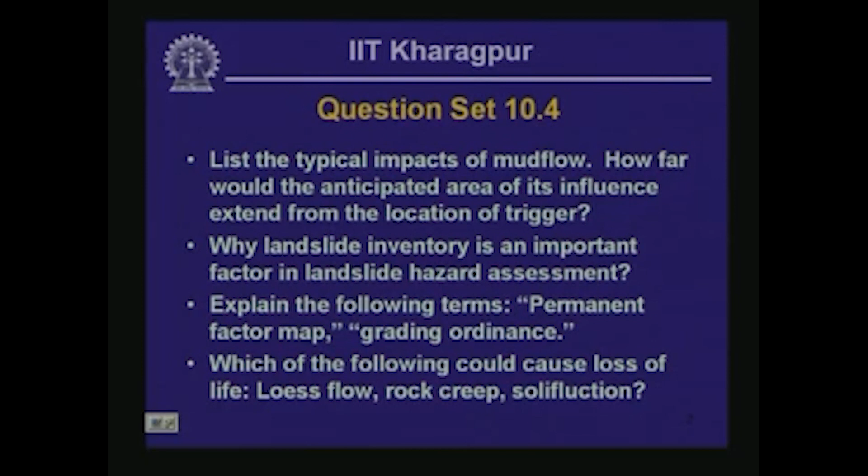Now let's get back to the steps involved in preparation of the permanent factor map. Here is an example. You remember from the previous lesson that you have to combine all the factors that affect landslide possibilities in a given area and express the quantities as fractions associated with different types of units that have different types of hazard possibilities.

So the factors in this particular example are as shown in the first bullet there. These are all arranged in ascending order, and then you try several different classes. For example, if you have a very small proportion of a given land unit affected by landslides or underlain by landslide debris, we call it class 1. In the first trial, let's take the limits of 0.01 to 0.29 for that class.

Class 2 is intermediate landslide hazard, where the factors of the area affected by a landslide or underlain by landslide debris range between 0.29 and 0.58, and if you have more than 0.58 percent of a given area underlain by landslide deposits or affected by landslide activities, then we call it class 3.

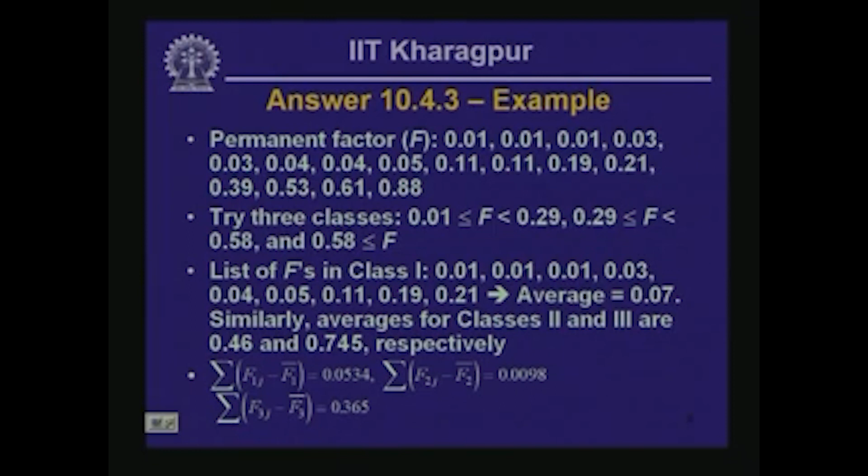Then we move on to the next step. Here we sum up all 3 quantities obtained in the previous step, and we obtain a double summation. Here again the squares are missing, so note there are squares in these terms which appear within the bracket. The result of this calculation is 0.0996.

Then we try new interclass boundaries. If you recall, we had boundaries at 0.29 and 0.58 in this trial. We try a new interclass boundary and carry through the same steps to compute the double sum result obtained in the previous step, and check whether this number is going up or down. Our objective is to minimize the double summation quantity. Once we obtain a minimum value, that is the interclass boundary that classifies the region into 3 zones of low, intermediate and high landslide hazard.

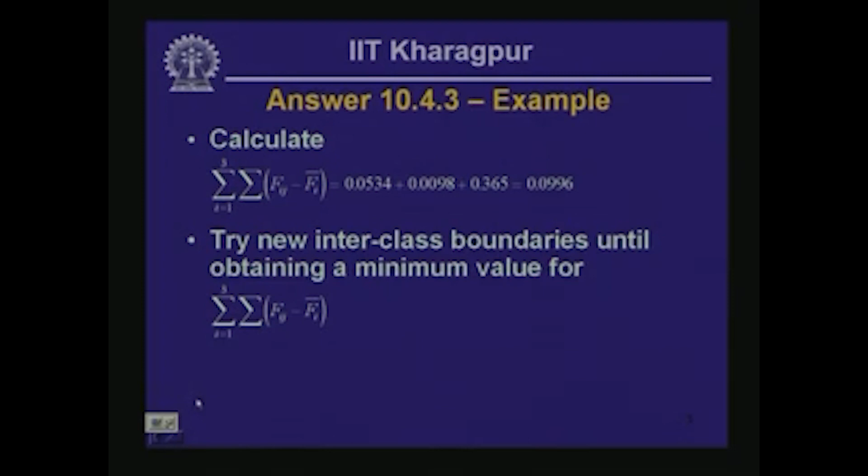That completes the question set of the previous lesson, and now we move on to this lesson. What we want to learn: we would like to identify subsidence hazard, then hazards due to swelling and collapsible soils, and list typical mitigation measures for each of these individual hazards.

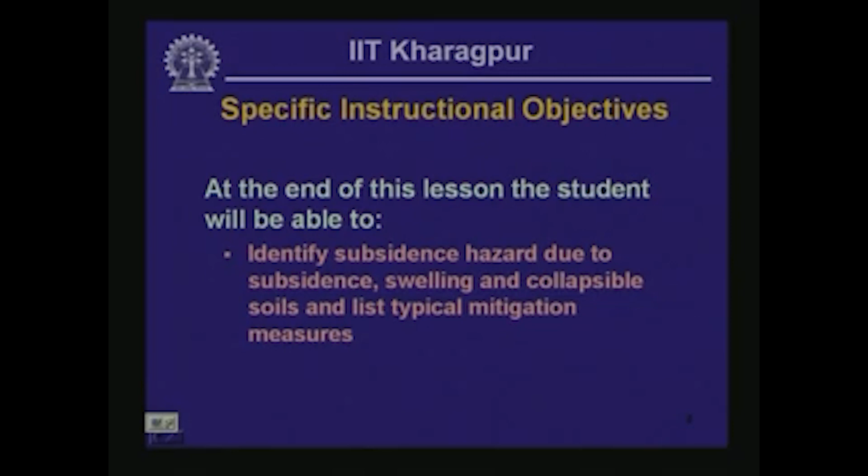There are really 3 subtopics: subsidence, expansive soil, and collapsible soils, and we are going to take these 3 subtopics one by one.

So first we consider the subsidence hazard, and let's first look at the possible causes of subsidence. If you have any underground excavation or underground opening, that could be a cause of subsidence hazard, and an underground opening could be created as a result of underground mining activity such as longwall or room and pillar mining.

In longwall mining, if you have an area underlain by economic minerals such as coal, a large area is gradually mined out, and the opening is allowed to collapse in a controlled manner. Longwall mining allows the collapse of the roof of the mined out area, and as a result it also allows subsidence to develop, although in a controlled manner at shallower depths, and the effect of this subsidence could extend to the ground surface.

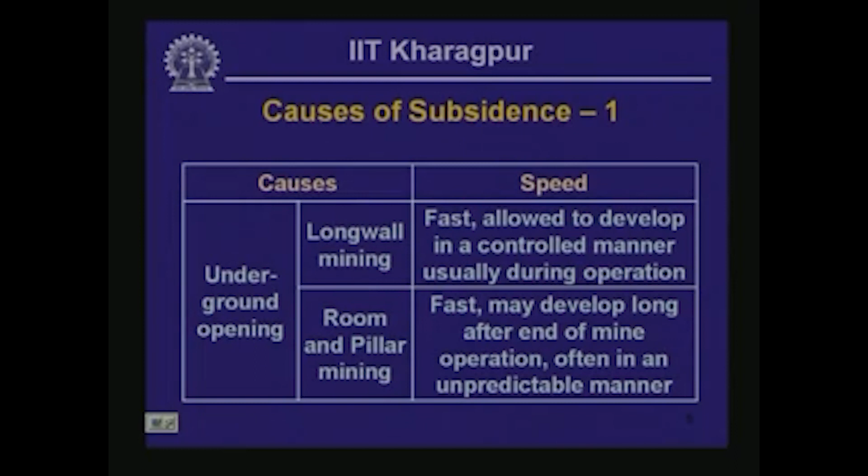But the problem here is, depending on the time of exposure, weathering, or other factors such as fire that spontaneously develops within mined out areas of abandoned coal mines, some of the pillars left behind during the original mining activity could eventually fail, and because of this, subsidence could develop near the ground surface in a very fast and sometimes unpredictable manner.

So you really need to understand the difference between these two processes of underground mining: longwall mining and room and pillar mining. In longwall mining you allow subsidence to develop, but in a very controlled manner, so the sequence can be engineered and the hazard because of subsidence can be managed. In room and pillar mining, on the other hand, the control is really not there that much.

There could be other types of underground excavation which also lead to subsidence, such as if a tunnel is excavated within a few meters from the ground surface, that could also cause deformation, permanent deformation at the ground surface.

Supported excavations and other types can also cause slow and predictable subsidence, and because the deformation is quite slow and predictable, this could cause damage to structures, but the loss of life in this particular case is minimal.

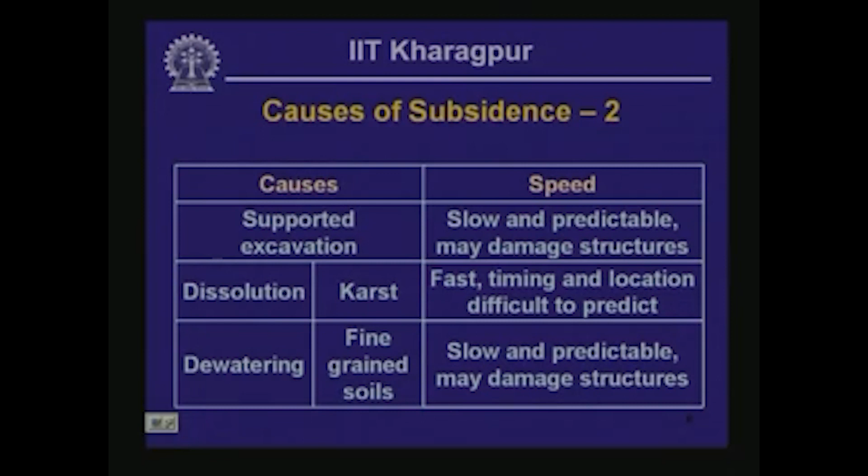But in some areas near the location of dewatering activity, properties could get damaged because of the relative displacement that could prevail across the structure in consideration. Because there is a possibility of uneven settlement, uneven subsidence near the location where dewatering is going on, structures constructed near this location could be damaged because of the uneven settlement.

You should realize that if the entire breadth of the area across the structure settles uniformly, then there is very little possibility of damage to the structure, especially if the subsidence occurs at a slow pace. On the other hand, even if the subsidence occurs at a slow pace, if there is uneven settlement, uneven subsidence across the structure or building, then there could be substantial damage caused because of the uneven settlement.

So, these in a nutshell are the different types of agents that could cause subsidence, and their effects, really about the nature of damage that could be caused because of these individual agents of subsidence. Now, let us look at the features that could be caused by subsidence resulting from the causes that we discussed in the previous two slides.

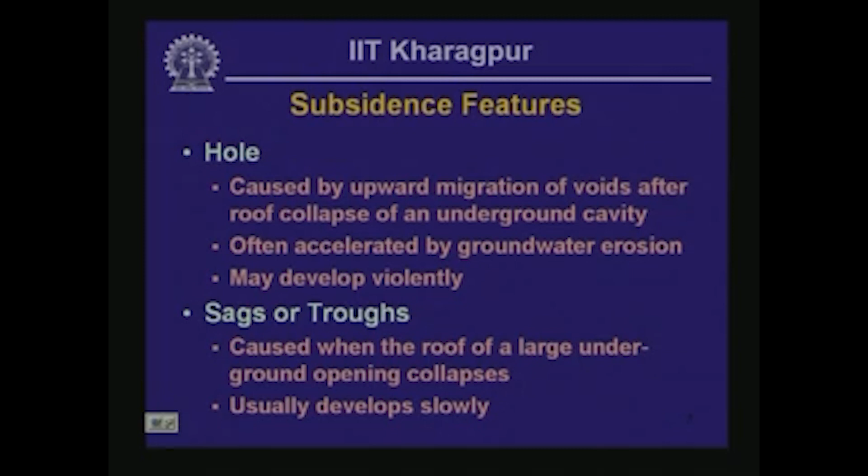Sags or troughs could also develop when the roof of an underground mined-out area collapses over a large areal extent because of near-simultaneous failure of a large number of pillars in case of room and pillar mining. So sags or troughs could develop because of long wall mining, as well as in areas underlain by abandoned room and pillar mines, if a number of pillars give way at the same time.

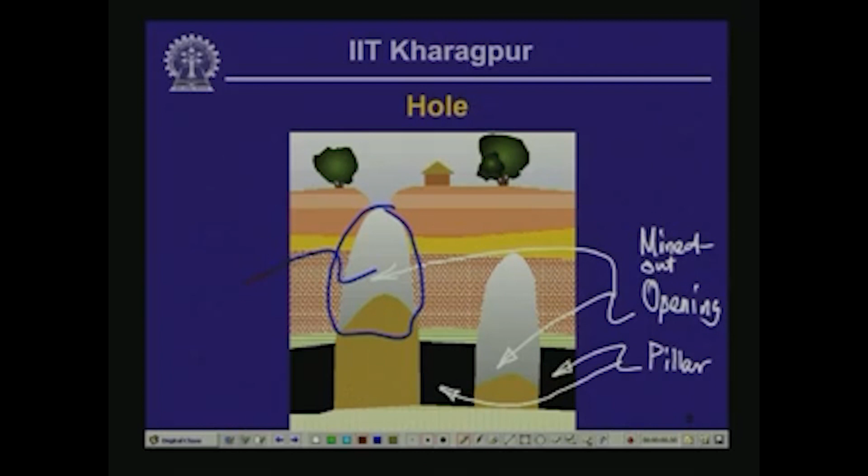So in this instance, what happened is the roof in this particular area collapsed. So the roof here collapsed, and that collapse of the roof of the mined-out opening led to the dumping of debris. So this is the debris that got generated because of the roof collapse, and in the process a hole formed in this particular area.

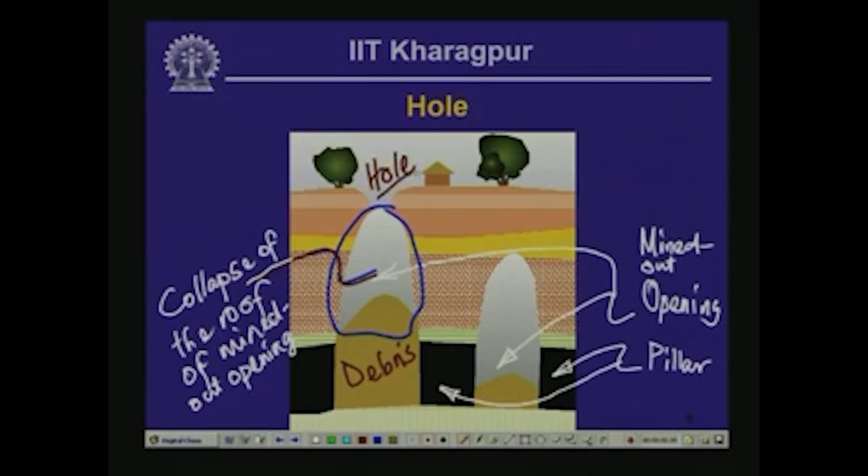Now you can easily imagine, if this particular building that is shown here was nearer to the hole, then the building would have had to undergo severe damage.

Now there is a little bit of roof collapse for this particular opening as well, but the collapse is yet to daylight near the surface, and eventually there is a possibility of development of another hole in this area. You really do not know, it is difficult to predict how long it will take before a hole develops in this particular area. But we can say that the area shown in this cross section is in general susceptible to development of subsidence holes.

Now let us look at the other type of subsidence feature, which is a trough. In this case, simultaneous collapse of several different openings is the cause for the development of this type of feature, and as a result what you see is development of subsidence over a relatively wide area.

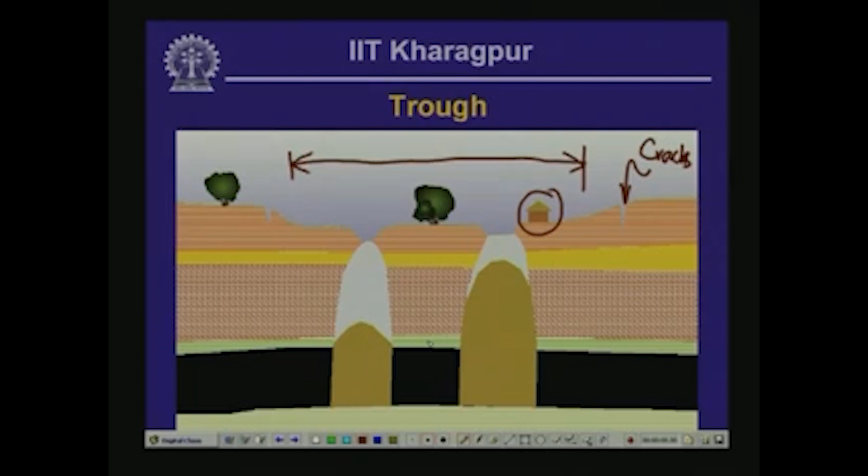Now longwall mining allows this type of feature to develop in a very controlled manner, and engineers could actually sequence their mining activity in such a manner that inhabited areas could be spared from this type of damage.

All right, so subsidence vulnerability - how do you actually assess subsidence vulnerability? To a large extent it follows from the discussion we already had regarding subsidence.

Areas underlain by shallow room and pillar mine workings are particularly vulnerable to subsidence, and there are instances of this type of subsidence in eastern India, in the coal fields of Raniganj in western West Bengal and Jharia in the adjoining Jharkhand area. That area is affected by subsidence because of shallow underground room and pillar mining.

And what complicates the matter in many of these areas is the burning of coal left behind from previous mining activities. This burning is causing mine pillars that were left behind to collapse, and some areas are sinking in the Raniganj and Jharia coalfield area in a very unpredictable and disturbing manner.

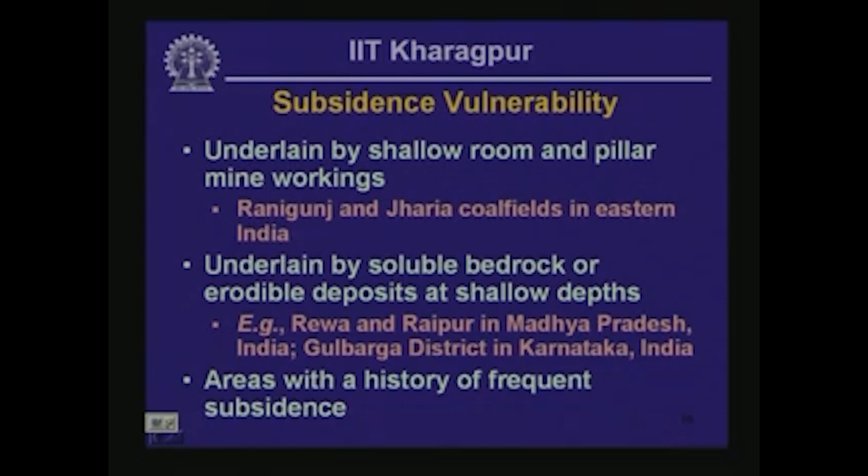Now, what are the mitigation strategies to counteract the effects of subsidence? You can identify the areas where there are underground cavities. The cavities could be man-made, or they could be solution channels, caves, or caverns formed because of groundwater movement through soluble bedrock.

Then you could try to predict the development of subsidence, as is a strategy in case of longwall mining. You could avoid or evacuate hazardous areas. Then there could be structural measures, which include backfilling or grouting of underground caverns and cavities or mined out areas.

Then you could include some measures which can absorb compression, such as a perimeter trench. I am just going to explain it in the next little bit - just bear with me for a second.

You could also have a structural design so that the building is capable of absorbing a relatively large amount of differential settlement, but this measure could be quite expensive actually, and this could make residential development in the area unviable.

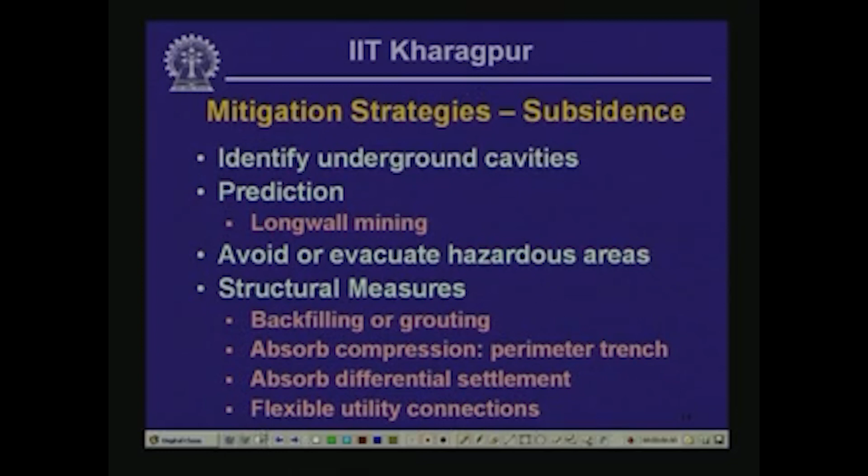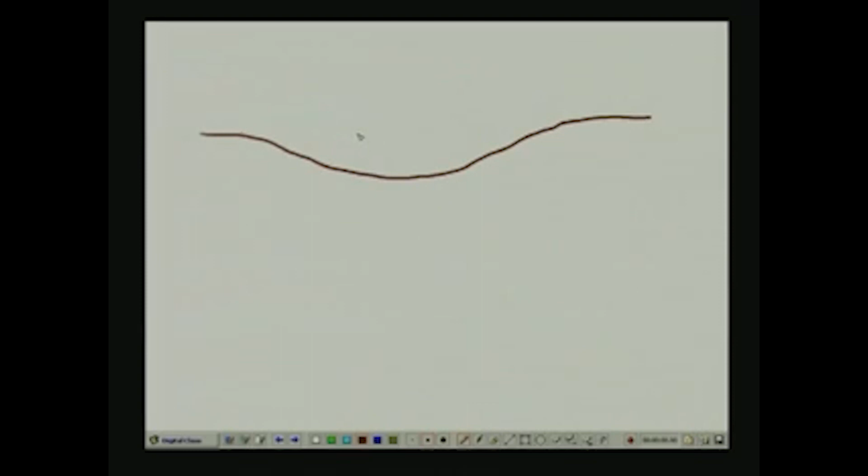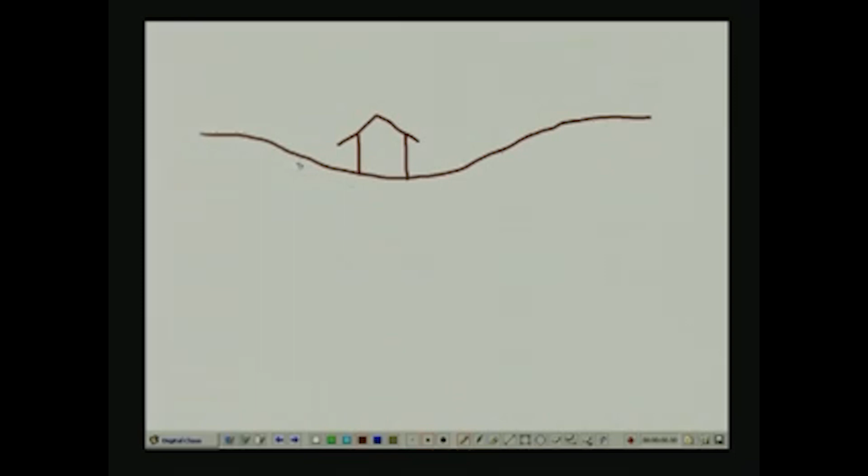But let me explain what I meant by perimeter trench option, which I considered here. Let's say you have an area that you expect is going to be affected by subsidence of this nature, and the structure is out here. So you can imagine that the soil layers, because of the development of this type of feature, the soil in this area is compressed towards the structure, and that causes many structural failures.

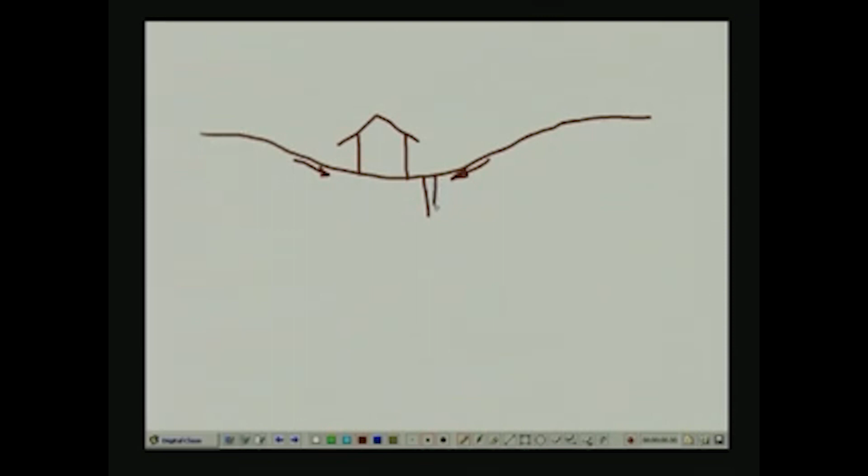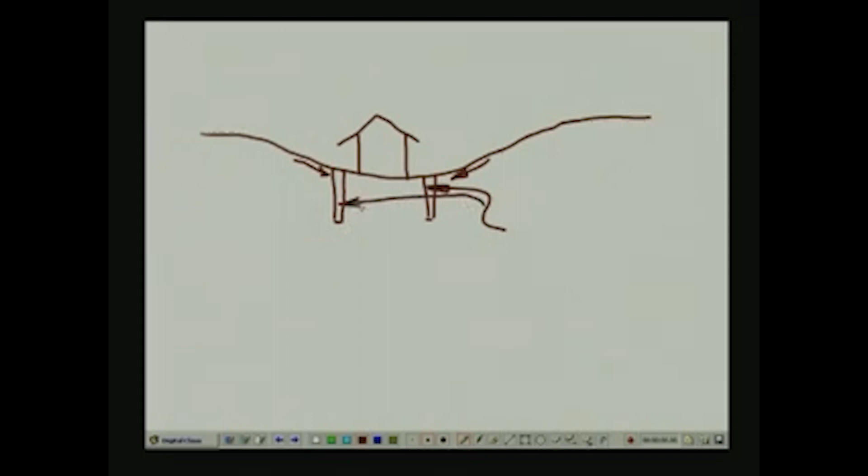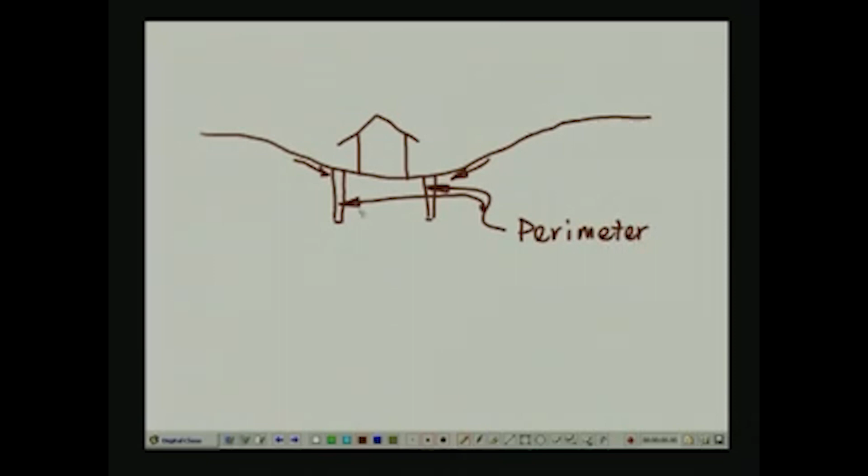So what is done in these instances, if you could dig a trench and backfill the trench with soft compressible material such as loosely spaced sand or other clay filling, other soil filling. These are the perimeter trenches, and we backfill the trench with compressible filling such as loose sand.

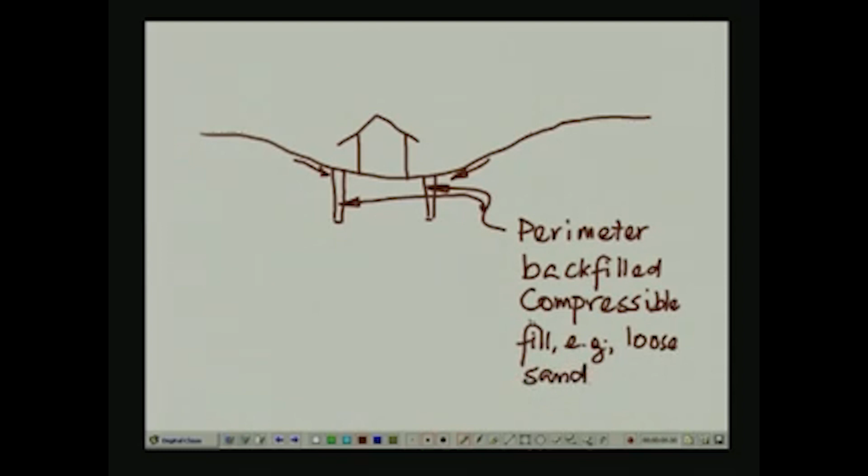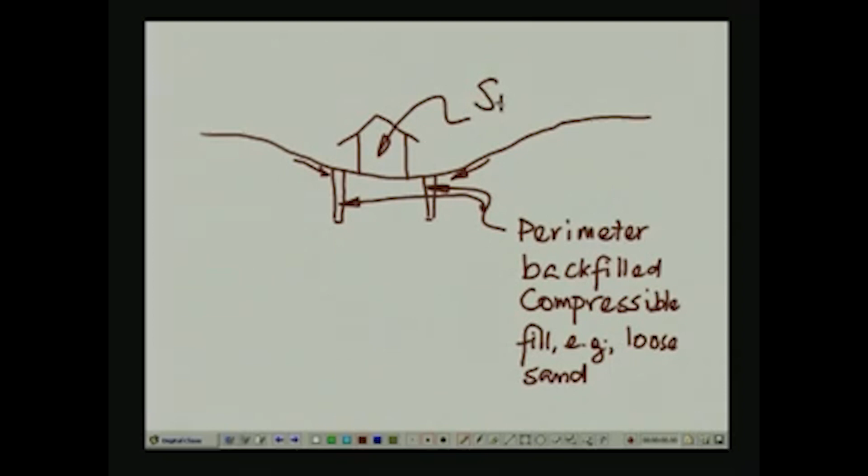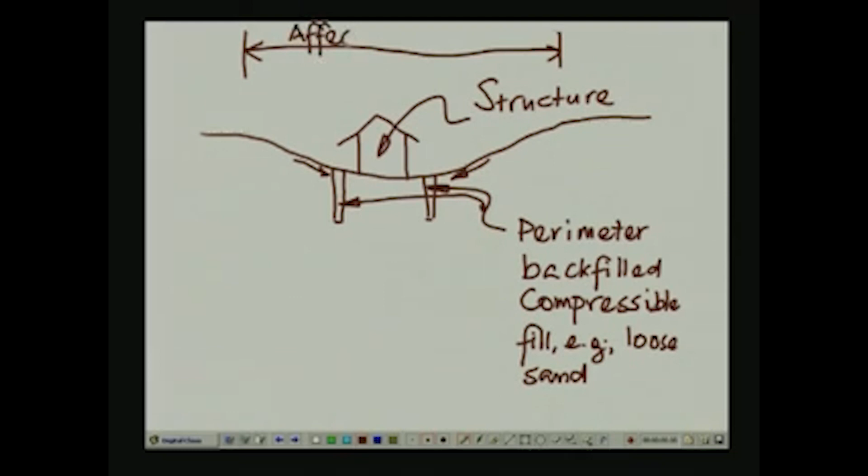Then that to a large degree controls the damage that could be caused to a structure within the zone of subsidence, because the compressible backfill within the perimeter trench is going to accommodate the amount of compression that is observed within the area affected by subsidence. So this is the area in this particular case affected by subsidence. Okay, so that is the function of perimeter trench.

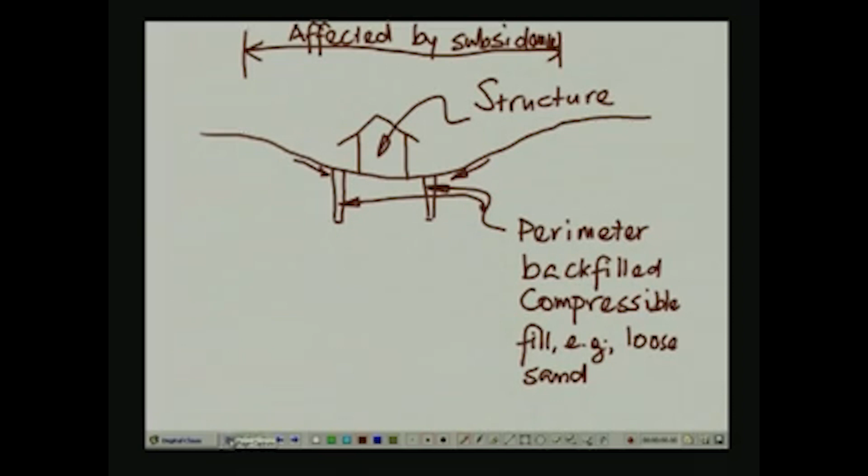Now next topic is really shrinking and swelling soils. Now, what kind of geological setting readily gets associated with shrinking and swelling soils? They are as follows: smectite minerals and sometimes illite minerals. If there is an abundance of smectite and illite clays, then that is an area you should watch out for as far as swelling and shrinking is concerned. Then weathered rock containing clay minerals is also susceptible to swelling and shrinking, because weathering of many types of rocks that leads to the development of clay minerals actually leads to an expansion in the volume of the material.

So that leads to swelling. Examples of typical geologic settings affected by shrinking and swelling are as follows: clay shale, clay siltstone, sandstone, and black cotton soil.

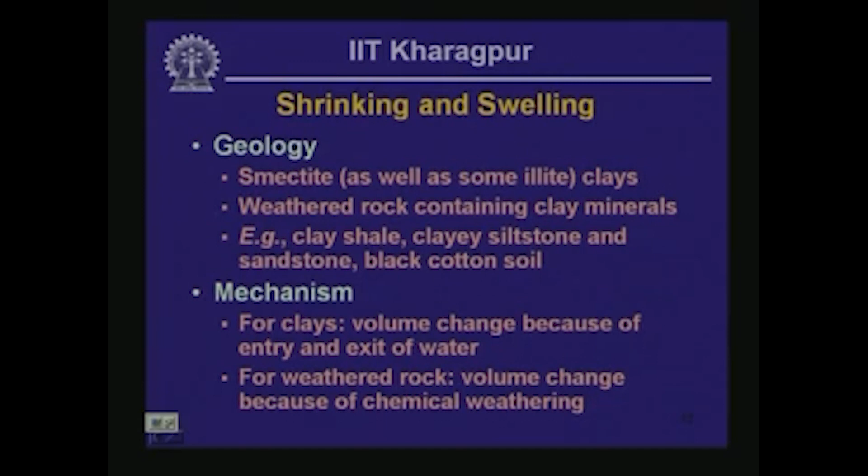Now let's look at very quickly the mechanism that leads to the development of shrinking and swelling. For clays, what happens? There is a volume change triggered by entry and exit of water in between the plate-like particles that we talked about some time back in this course. And for weathered rock, volume change is initiated because of the chemical weathering of the rock forming minerals, and particularly as the rock minerals get weathered and lead to the formation of different types of clay minerals, there is a volumetric expansion associated with that activity.

So that is the reason why if there is an abundance of clay minerals, particularly smectitic and illitic minerals, then that area you can expect a lot of swelling and damages related to swelling and shrinking.

Okay, now this is an example of consequence of shrinking and swelling. Typically the process is quite slow in many situations because it requires entry and exit of water into the matrix of fine grained clay particles. So the process generally occurs at a slow pace, and this in fact could lead to severe damage of property, but usually the possibility of loss of life could be discounted.

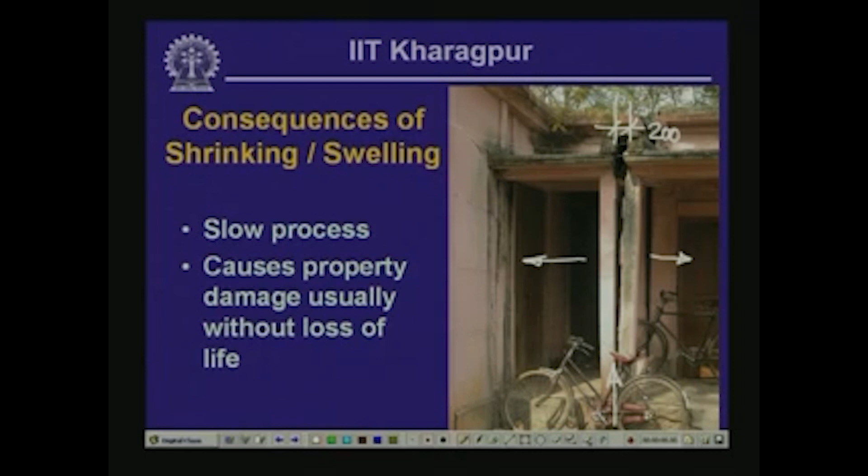And this crack here is approximately 200 to 250 millimeter in this particular case. So this entire thing is occurring because of the presence of swelling clay underneath this particular structure. Now you should realize that this swelling clay is not categorized - actually that was one of the sites that we investigated. This particular swelling clay is not categorized as high swelling clay. In fact the swell potential is medium to low in this particular instance, but even then you can see that quite a significant property damage has been initiated because of the swelling activity of the underlying soil layer.

Shrinking and swelling identification is largely accounted for by identifying the hazard and accounting for the possibility of shrinking and swelling. Hazard identification typically involves identification of mineralogy and clay content. Usually the greater the clay mineral percentage, plasticity index and stiffness, the greater the swell potential.

Usually soils affected by swelling exhibit an appearance of popcorn. If you look at the natural surface of shrinking and swelling soil, it often takes the appearance of popcorn, just like the surface of a cauliflower.

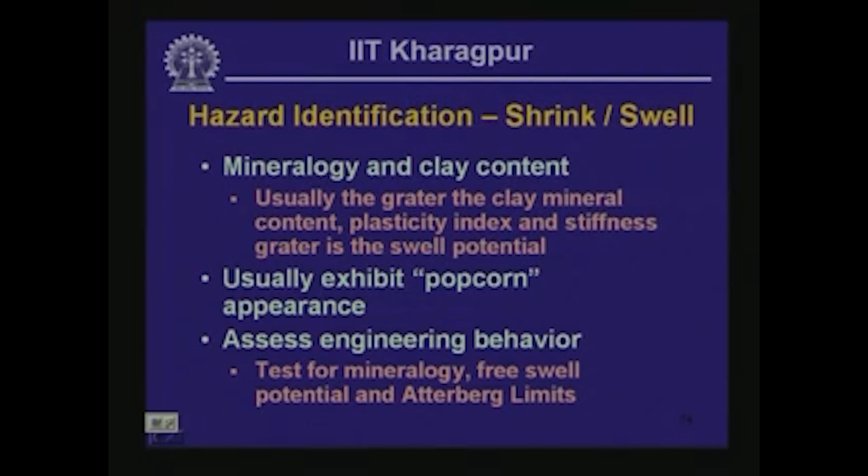Then we need to assess the engineering behavior of soils likely to be affected by shrinking and swelling. Many correlations are available which allow the engineer to estimate the pressure that could come onto a structure constructed on swelling clay because of shrinking and swelling, due to water ingress and egress from the mineralogy and from Atterberg limits.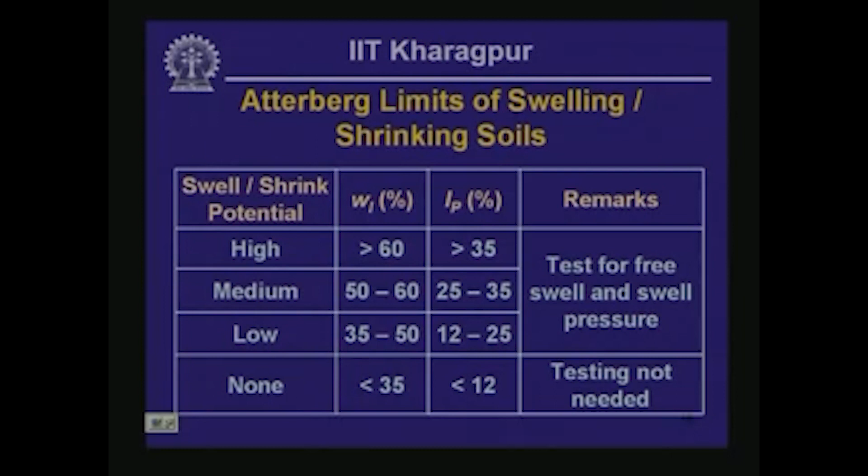If you ascribe some shrink swell potential to the soil at a given location, you need to do laboratory testing of the material, bring a sample to the laboratory, and test it to quantify how much swell pressure could be associated with the deposit, or how much pressure a structure will encounter due to entry and egress of water into the soil underneath it. Once that is ascertained, special structural design can accommodate the amount of movement, or ground modification may be required to minimize the entry and egress of water that causes the swelling or shrinking in the first place.

That leads us to the mitigation strategies typically associated with shrinking and swelling. As usual, the first mitigation strategy is to avoid the areas affected by shrinking and swelling, but that is not always possible, so we have to move on to other mitigation measures.

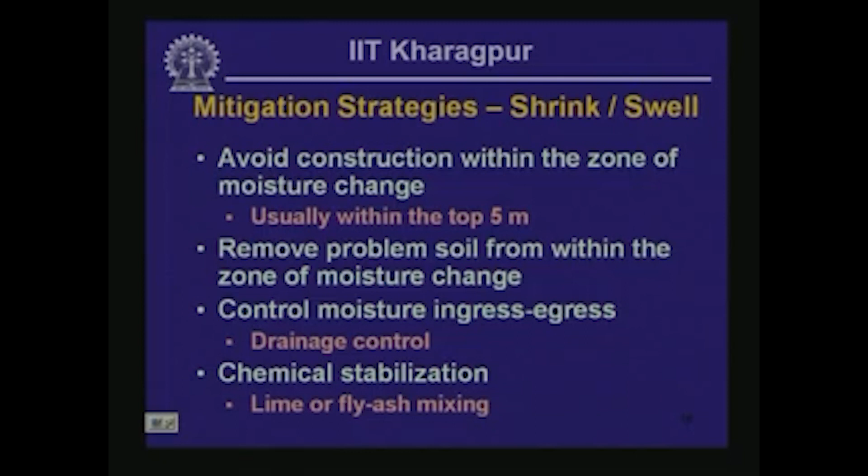The final topic we are going to look at is collapsible soils. Collapsible soils are those that collapse without any additional loading because of wetting. When water enters the soil, the structure collapses. This type of soil is often found in arid or semi-arid climates. Typically, soils that have weak interparticle bonds, such as those from deposition of salt or calcium carbonate deposits at the grain contact, get classified as collapsible soil.

The mechanism that leads to collapse is as follows: the soil structure collapses when entry of water dissolves the weak cementation bond that causes the collapse.

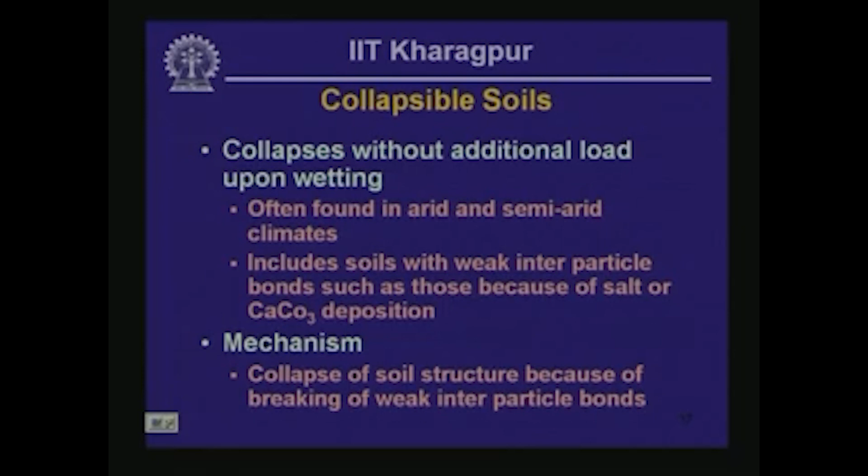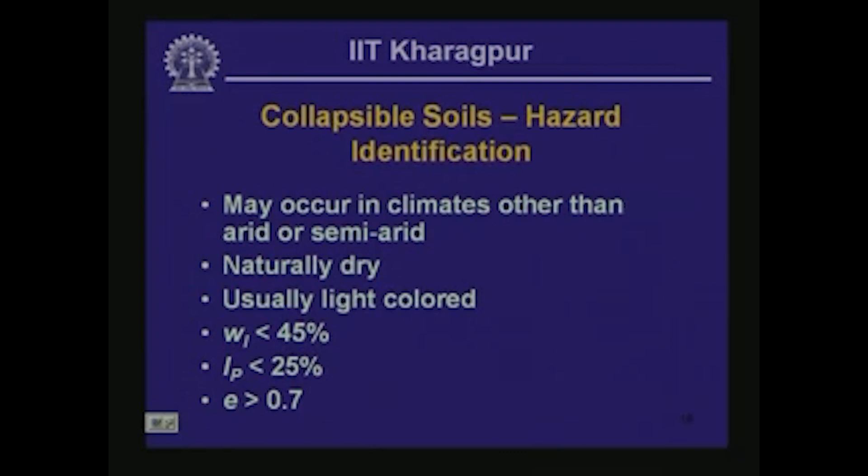As we did for shrinking and swelling soils and rocks, we are going to try to identify the hazard associated with collapsible soil. Collapsible soils may occur in climates other than arid or semi-arid, but they are more abundant in arid or semi-arid areas. The collapsible soils are typically dry, usually light colored, and have a liquid limit typically below 45%, plasticity index typically below 25%, and void ratio typically above 0.7.

Mitigation strategies to avoid problems associated with collapsible soils: if collapsible soil is encountered at shallow depth, it is imperative that the soil is not allowed to get wet, or that pre-wetting is done before any structure is constructed, followed by heavy compaction of the soil before construction of the structure, building, road or other facilities. If collapsible soil occurs at great depth, we could go for deep foundations that transfer the load of the structure to a layer underneath the soil that may be affected by collapse due to entry of water.

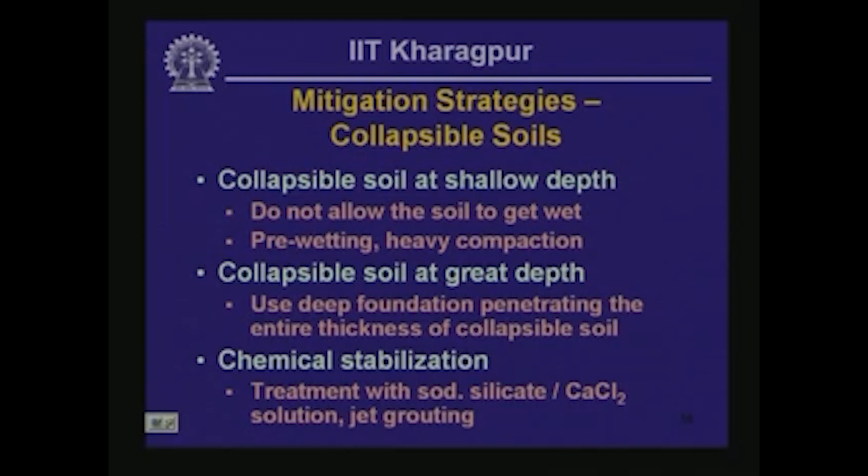In this case we could also go for chemical stabilization, which typically involves treatment of the soil with sodium silicate and/or calcium chloride solution, reinforcing the weak cementation bond and giving some permanence to the strength of the interparticle bond. Alternatively, we could go for jet grouting, which involves pumping grout material, cementitious or otherwise, at great pressure to reinforce the interparticle bond as well as compact the potentially collapsible soil. These are the typical mitigation strategies used for collapsible soils.

Now we have come to the end of this lesson. To summarize what we learned: we looked at a list of features associated with subsidence and how they develop, the nature of subsidence hazard and mitigation strategy, identification of hazard related to swelling and collapsible soils, and the mitigation strategies to account for hazards related to swelling and collapsible soils.

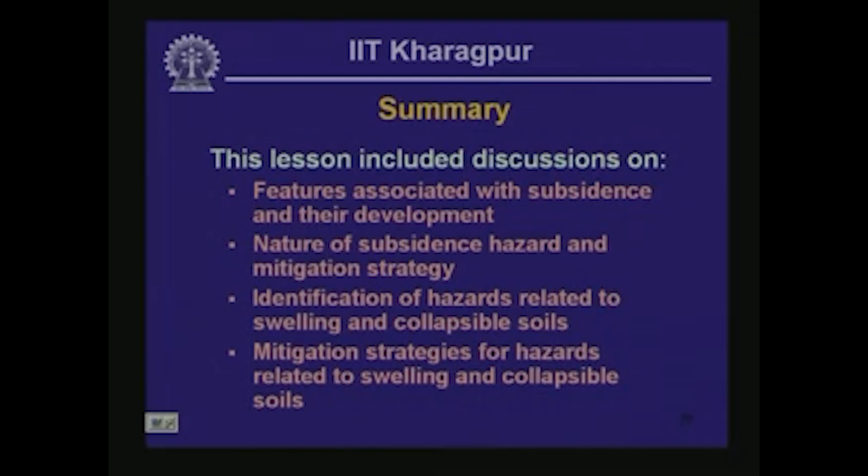We end this lesson with a question set. The first question asks whether the following statements are true or false: swelling soils are found only in desert; collapsible soils are usually dry. Second question: can a clayey silt soil of high plasticity be typically classified as collapsible soil? Third: can a soil with high swell potential be classified as CH? You should look back to your earlier notes in this course to answer these questions.

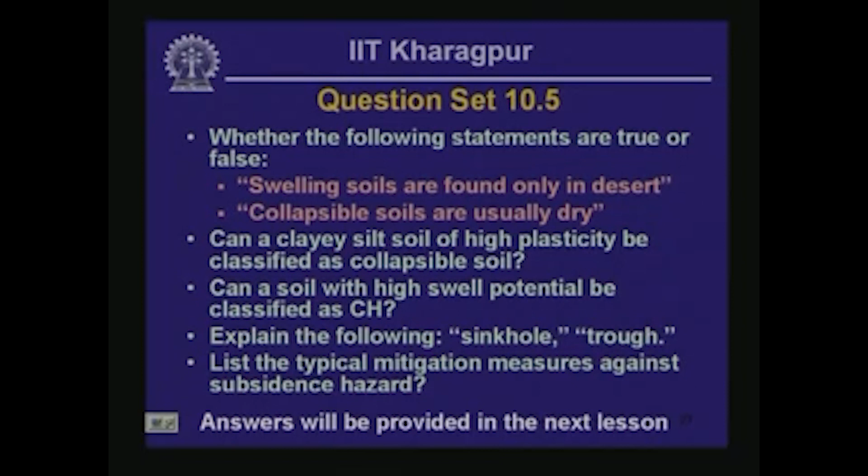Fourth question: explain the following sinkhole and trough, and finally, list the typical mitigation measures against subsidence hazard. Okay, that brings us to the end of this lesson.

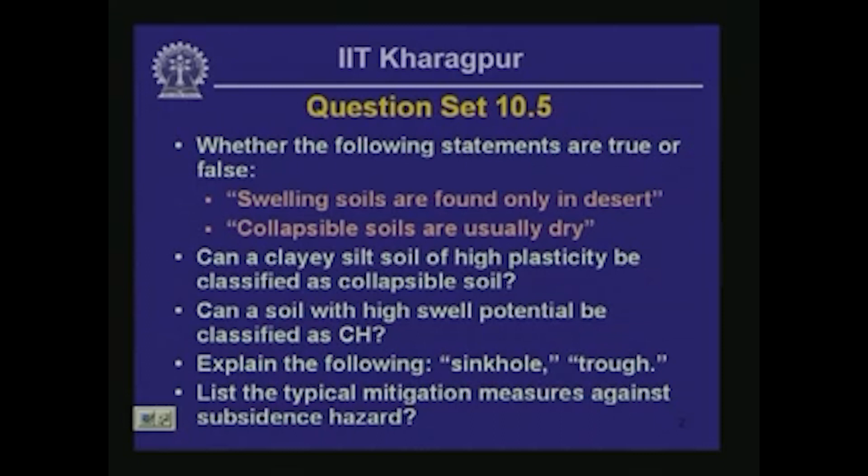Swelling soils could also be present in situations where there are a lot of clay minerals between rock joints. In such situations there could be a lot of potential for swelling in the shallow layers near the ground surface. These geologic settings are not necessarily found only in deserts; they are also found in other hydrometeorologic environments.